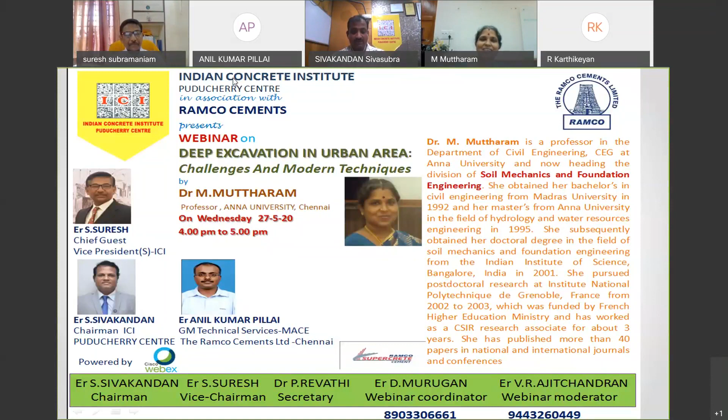Introduction of Dr. M. Muttharam. Dr. M. Muttharam is a professor at the Department of Civil Engineering, CEG, at Anna University, and now heading the Division of Soil Mechanics and Foundation Engineering. She obtained her bachelor's in civil engineering from Madras University in 1992 and her master's from Anna University in the field of hydrology and water resources in 1995. She subsequently obtained a doctoral degree in the field of soil mechanics and foundation engineering from the Indian Institute of Science, Bangalore, India in 2001.

She pursued postdoctoral research at Institut National Polytechnique de Grenoble, France from 2002 to 2003, funded by the French Higher Education Ministry, and worked as a CSIR Research Associate for about 3 years. She started her academic career as a lecturer at CEG, Anna University in 2003, was promoted to Associate Professor in 2006, and then Professor in 2014. She has published more than 40 papers in national and international journals and at conferences. She has also served as Secretary of the Chennai chapter of the Indian Geotechnical Society for 5 years and is currently an executive committee member of the same chapter.

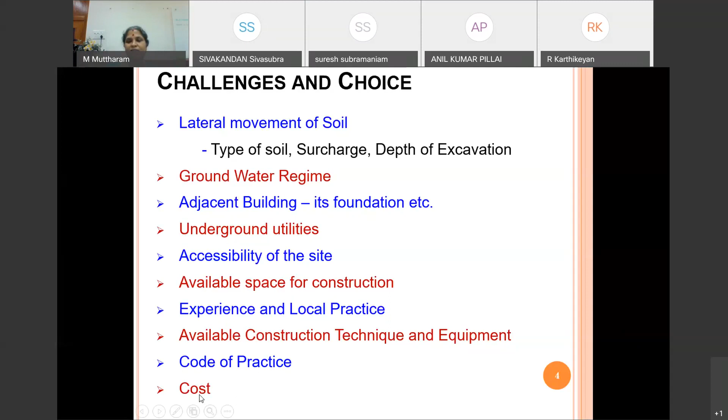And finally, needless to say, the cost of the project matters - though we want to give an economical solution, not at the cost of safety. So we have to give a safe as well as economical solution. If we want to give a safer solution for excavation, different types of support systems are available. A few of them I have listed here: starting with braced excavation, sheet pile wall, bored pile wall. We can go for soil nailing, and finally diaphragm wall.

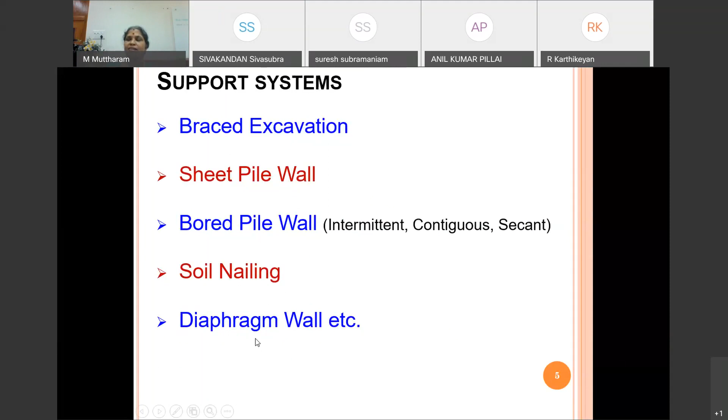If we use braced excavation, one of the problems we encounter is the working space. Here we have to excavate, and this working space would be provided with so many horizontal members, so the space is not free to work. That is one of the important constraints when we choose braced excavation. Though it is a conventional method, the problem encountered is that this free space is not available for our construction.

Then we can go for sheet pile wall. Sheet pile walls are of two types: either cantilever sheet pile or anchored sheet pile. Generally, cantilever sheet pile is preferred provided the depth of excavation is less than 6 m. If the depth of excavation exceeds 6 m, then we need to go for anchored sheet pile.

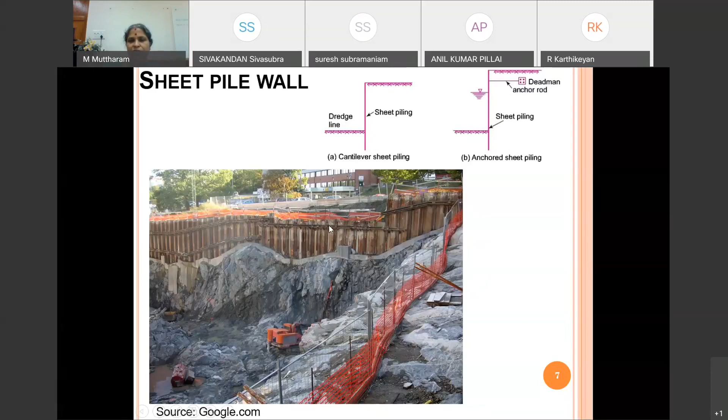The next method available, especially in urban areas, is bored pile wall. It is also a very popular technique used in urban areas for deeper excavation. In bored pile wall, we have different varieties. One is intermittent piles. This is very simple in the sense that the equipment and machineries used for constructing conventional bored pile may be adopted here also, so regarding the methodology and equipment we don't have any issues, because we can make use of existing machineries available for making the pile.

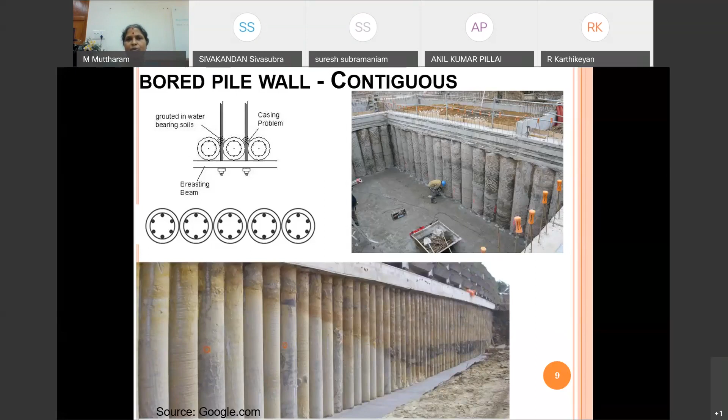The construction sequence is: first they insert the casing, if casing is required. After insertion of casing, the primary pile is constructed. Primary pile is made up of lean concrete; they may not use high grade concrete, because after making this circular pile, to construct the secondary pile we are going to drill through it, and only then is the secondary pile constructed.

That is why the quality of concrete used for this primary pile is lean concrete. The purpose of this primary pile is only to arrest the seepage of water.

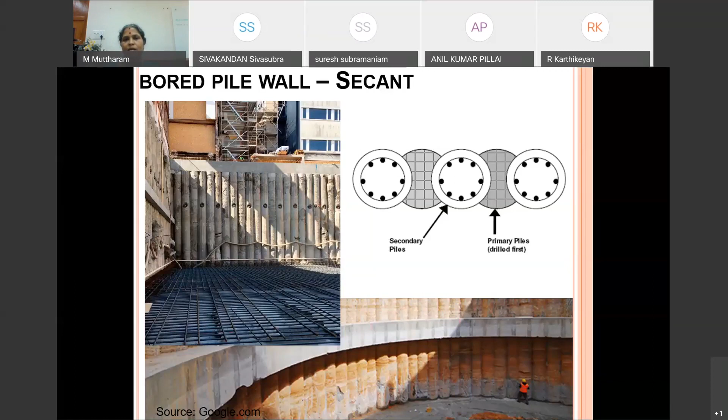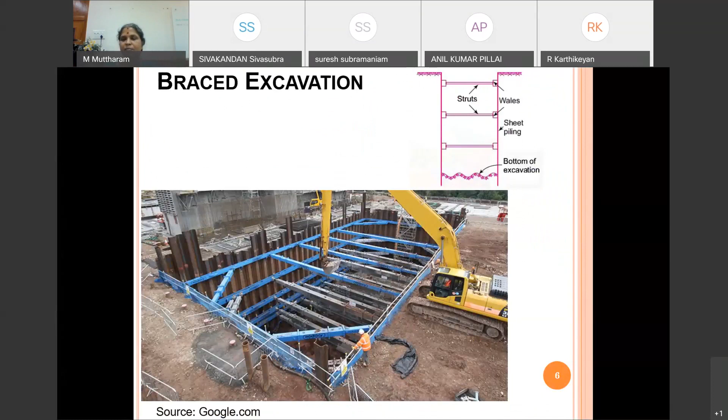Soil nailing is also a new technique. The concept in soil nailing is, so far we could see bored pile wall, and then even sheet pile wall, and braced excavation. In all these techniques, we have given support externally, meaning all these supports are passive supports. If the soil moves, then the supports are going to give the stability. Unlike in this case, in soil nailing, it is an active support.

This nail is being inserted into the soil, like how we insert reinforcement in concrete. But here this reinforcement is going to enhance the inherent property of the soil. So this type of support system comes under active support. Always this nail is going to be active, because of this insertion, this reinforcement is going to enhance the inherent strength.

Since we know that the shear strength of the soil is governed by the Mohr-Coulomb equation, we can express the shear strength of the soil using the simplest Mohr-Coulomb equation, where tau equals C plus sigma tan phi. In this equation, C is the cohesion component and tan phi is the friction component. This tan phi friction component will be enhanced if the stress normal to the failure surface is increased. So when we provide this soil nail, the normal stress normal to the failure surface is increased, because additionally the normal component of reinforcement force would come, and then the tangential component of this reinforcement force is going to directly counteract the shear forces.

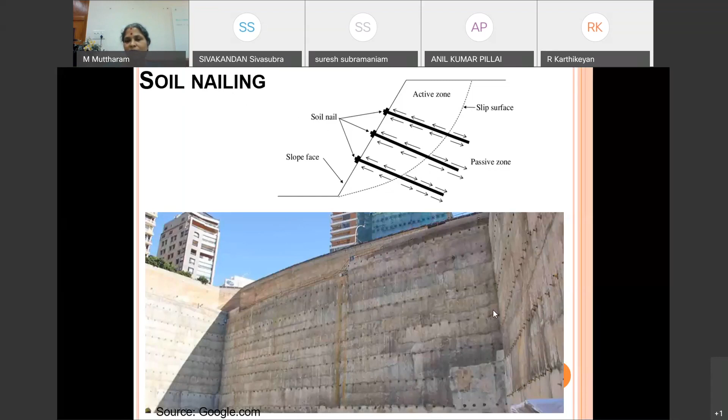Coming to diaphragm wall, I can say diaphragm wall is one of the modern technologies adopted for deep excavation. The way it has gained popularity is that this diaphragm wall is a rigid wall, and the lateral movement is going to be restricted to a considerable limit. Whatever may be the required limit for lateral movement, it is possible for us to achieve using this diaphragm wall. So that's why I call this modern technology.

And nowadays we have construction equipment. Several construction equipments are there. And the main principle behind the construction of diaphragm wall is using slurry supported trenches. We make a trench, and the trench is going to be supported initially by slurry. The slurry is made using bentonite. The availability of bentonite really made our job very easy to go for diaphragm wall.

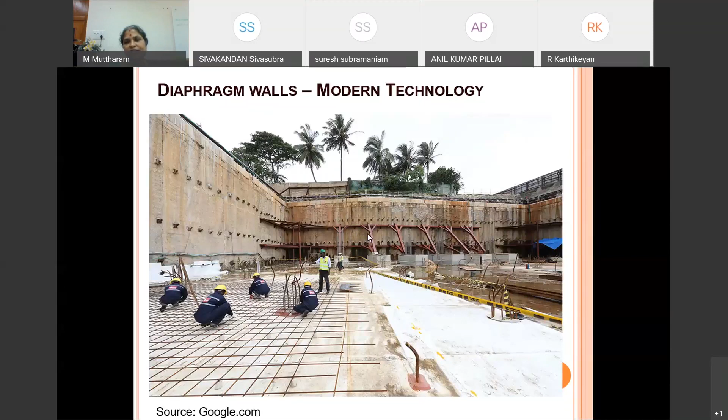This photograph shows the diaphragm wall constructed in one of the excavation sites. Another important aspect in diaphragm wall is that it can be either a temporary support or a permanent support, but mostly we would be designing diaphragm wall as a permanent support, in the sense it can share some part of the load from the superstructure as well. So mostly diaphragm wall is designed as a permanent structure.

And one more thing, this diaphragm wall is constructed as panels, so the number of joints present in the diaphragm wall is reduced compared to say bore pile wall. In bore pile wall, though we go for secant pile or contiguous pile, there is a joint between one pile and the other pile, so the number of joints are more. But in case of diaphragm wall, the number of joints are less. Why we should bother about the joint is, if we encounter the water table at a shallow level, water can seep in through the joints.

This will cause a problem, that is why we have to reduce the number of joints. In case of diaphragm wall, the number of joints are less, so it ultimately improves the water tightness, and it improves the stability of the wall. And since it is a rigid wall, the deflection of the wall itself is lesser, and we can easily make use of this even in congested areas.

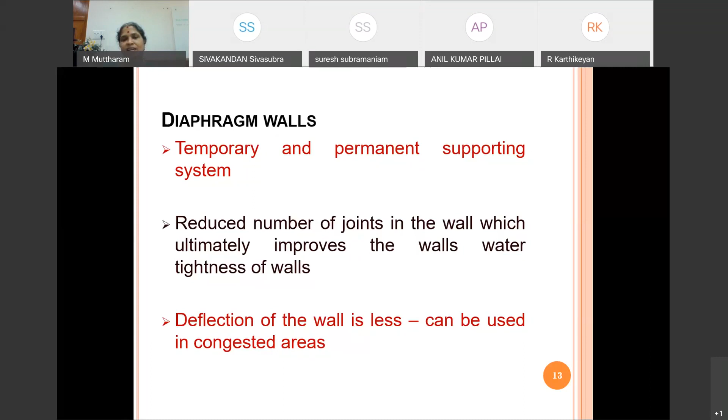A few applications of diaphragm wall are: it is used as a retaining structure for deep basements of buildings and traffic underpasses, underground mass transit stations, parking garages, underground industrial facilities, and so on. Even in our Chennai Metro Rail, for those stations, they have used a diaphragm wall underground. This underground mass transit station is being constructed using diaphragm wall.

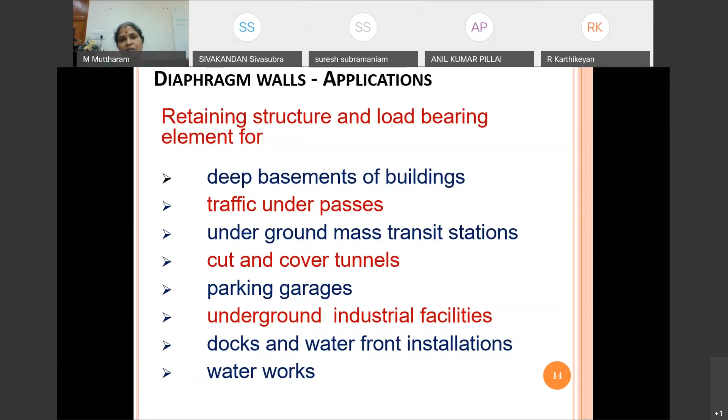Other advantages, from the perspective of construction engineering, are that we can make use of this diaphragm wall in any type of soil, irrespective of the type of soil and irrespective of the depth, regardless, and as well as regardless of the presence of groundwater table, we can choose diaphragm wall construction.

This construction of diaphragm wall simultaneously fulfills the task of sheeting, waterproofing, and load bearing. All three tasks are met in one thing by constructing this diaphragm wall. And each and every phase of operation is mechanized - we have machines to execute this construction work.

And the noise, whatever we get during its construction, is very less. So we can easily adopt this method. Even in a confined space, we can make use of this technique.

It has got excellent properties as a load-bearing material, especially when we go for basement floors. I can say that diaphragm wall is going to be one of the best methods of support system, because we can design the diaphragm wall such that it shares part of the load from the superstructure also.

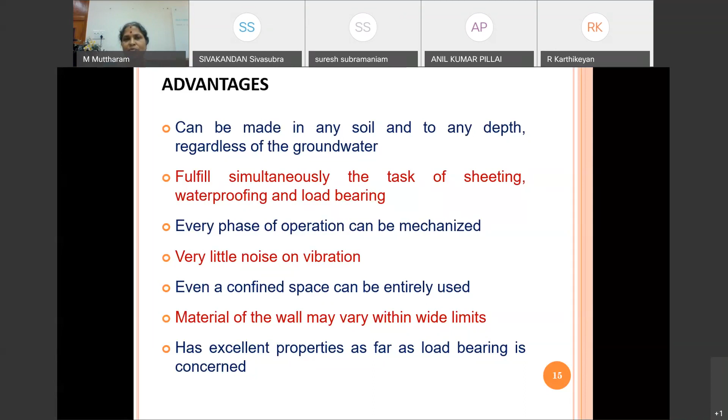Its stiffness is increased by giving buttresses. When we construct diaphragm wall, we can give buttress, and even we can give anchorages also, at different levels depending upon the depth of excavation. We have to anchorage properly this diaphragm wall so that we get the required stability.

Since this diaphragm wall is constructed in sections, we can easily carry out this diaphragm wall construction. And there is no major surface grading required before making trenching - we don't need to worry much about that particular size.

As I mentioned during our discussion on braced excavation, it doesn't give clear site. Braced excavation doesn't give clear site. But in this case, diaphragm wall would give simple and clear site compared to the other traditional foundation pit.

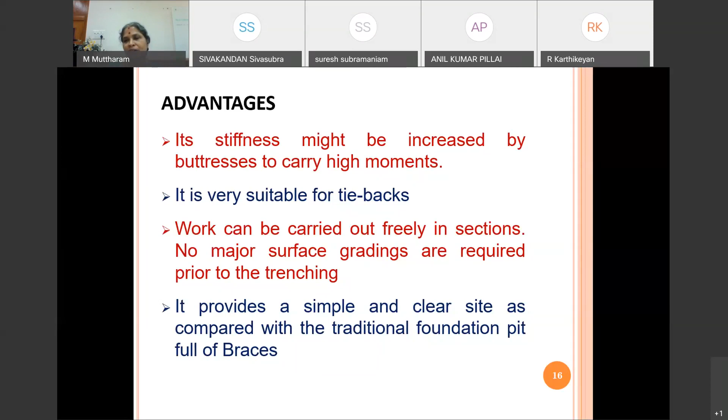So far I could discuss several advantages of diaphragm wall. Engineers, we should be aware of the disadvantages first, because we should not make any mistake during construction. When we make any mistake, then we have to pay a lot for it.

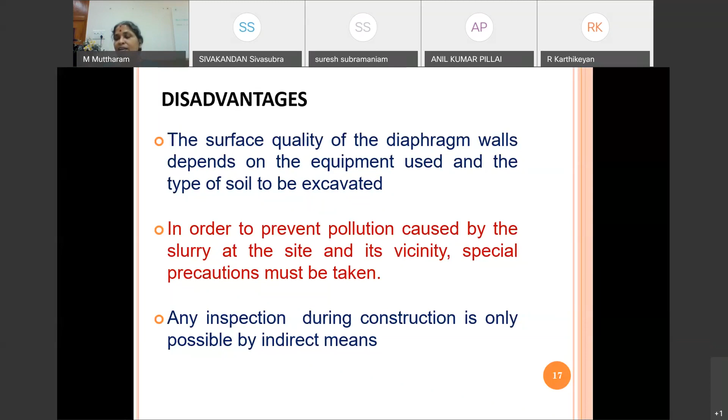The disadvantages are: the quality of diaphragm wall after construction mainly depends upon the equipment we have used and the type of soil on which we have excavated. Since we use bentonite slurry for constructing this diaphragm wall, the quality of concrete, whatever we get after construction, needs to be verified. And the quality could be verified only after construction, and that too through indirect means - directly, we cannot check the quality of wall, whatever we could get.

Other disadvantages: suppose if the site requires us to construct this diaphragm wall in open water, or in a layer where we have artesian water, or if we have a poorly compacted fill, or if we have existing buildings adjacent to this one, or unknown sewers, caverns, public utilities, etc. In that case, we have to prepare the ground first, then only we can go for this technique.

In case of coarse grained soil, there is going to be heavy loss of bentonite slurry. So if more loss of bentonite slurry is anticipated, we have to be very careful in using this technique. I don't say that it is impossible - it is possible. We should be careful about executing diaphragm wall when we encounter these conditions.

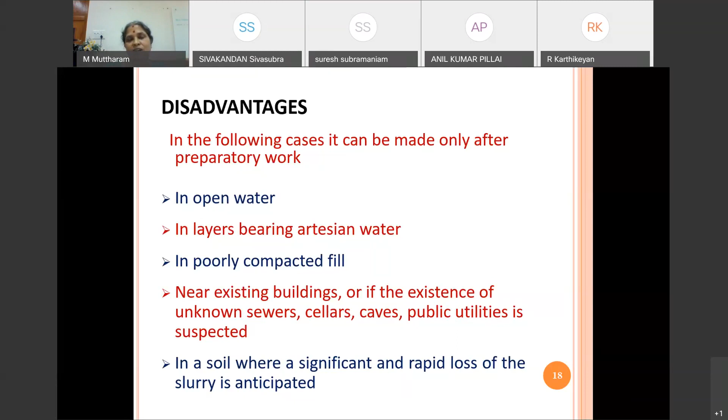Now let us briefly go through the construction sequence of diaphragm wall. Let us say this is the length of the wall to be constructed. This length will not be constructed in one single stretch. This entire length is going to be divided into different panels.

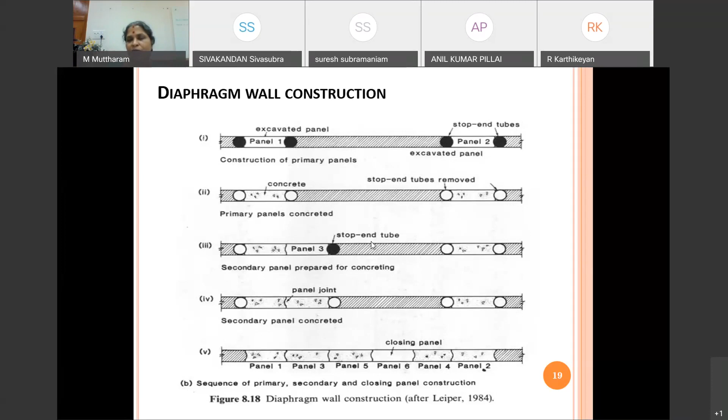Let us say here we have panel 1, and once this first panel is constructed, we move on to the second panel, starting from the other end of our excavation. This will not be constructed continuously. We start from one end, go to the other end, construct the second panel, then come back to this second end. In that way, we proceed with construction of the diaphragm wall.

Now here you see, this is our proposed first panel. Prior to construction of this first panel, we need to construct a guide wall. Guide wall design is very important, because the guide wall is going to guide the construction of the diaphragm wall. In this diagram, the top horizontal line is the top level of the guide wall.

After constructing the guide wall, this grab is used to remove the soil. Simultaneously, while removing this soil, bentonite slurry is continuously allowed to enter into this opening, so at any point of excavation there is no open space. The excavation is always being filled with slurry. That is why this technique is known as slurry supported trench. After removing this entire cutting, this area is being filled with bentonite slurry.

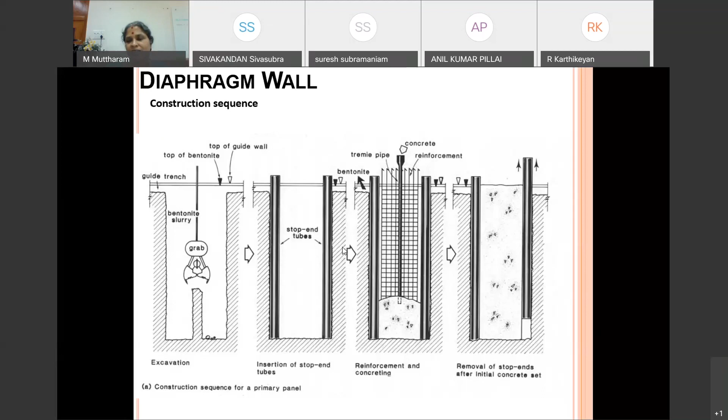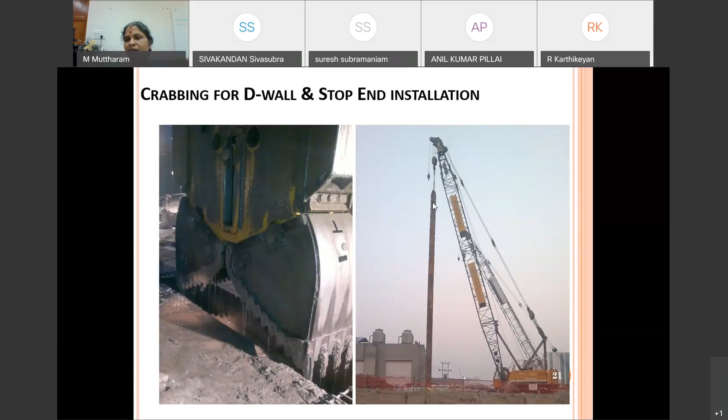From the procedure, you should have understood that this trench is always being filled with slurry, so it is never left as it is. That is why the stability is ensured. Here are a few photographs: this is the grabbing equipment used for construction of the diaphragm wall, and this is a stop end tube being lifted for erection. This is the close-up view of the clamshell excavating a slurry trench.

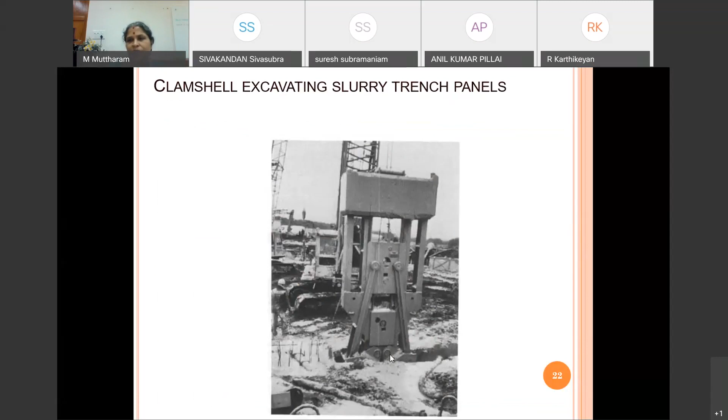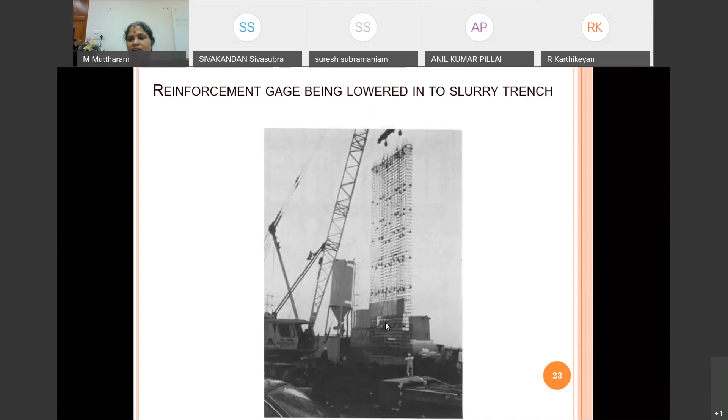In this slide, you can see the reinforcement cage. This is based on the bending moment expected in the diaphragm wall, so we should already have designed the reinforcement detailing. This is the form. This reinforcement cage is inserted into the trench, and then the trench is filled with concrete.

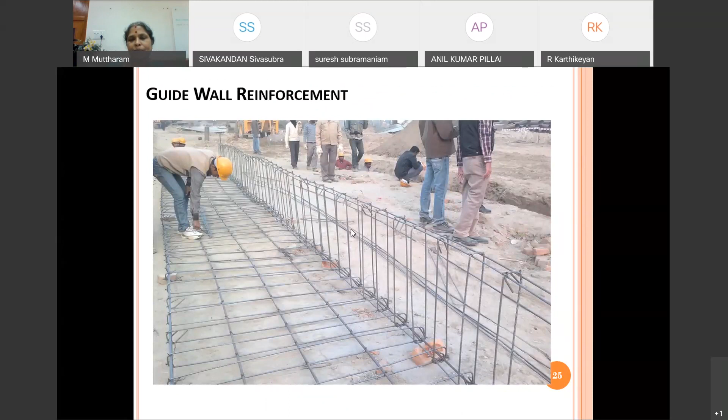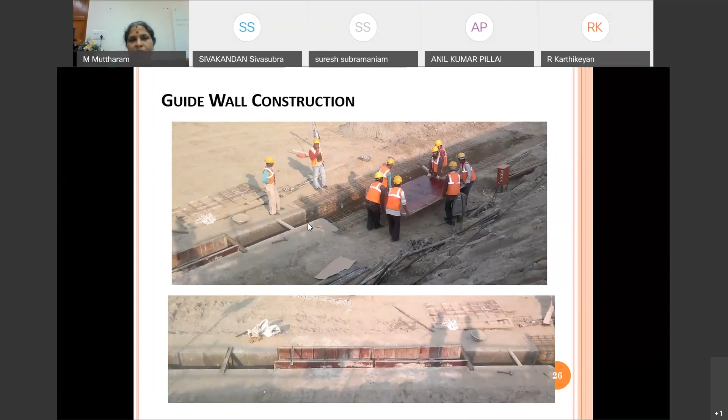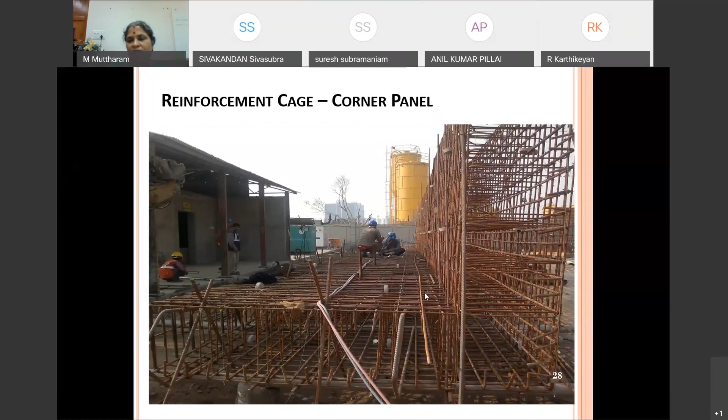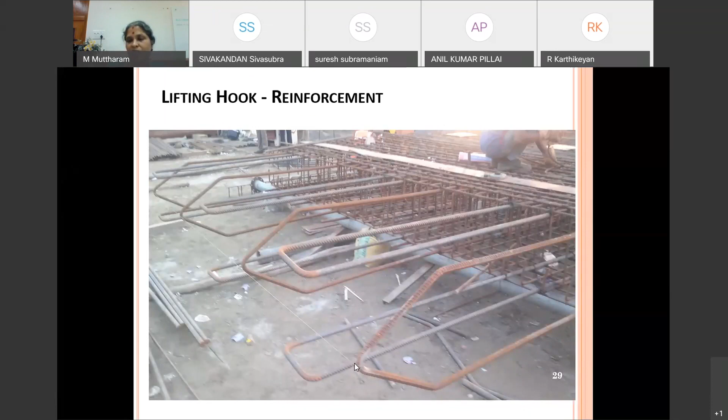In the reinforcement cage, this is the provision given to lift this reinforcement cage prior to inserting it into the trench.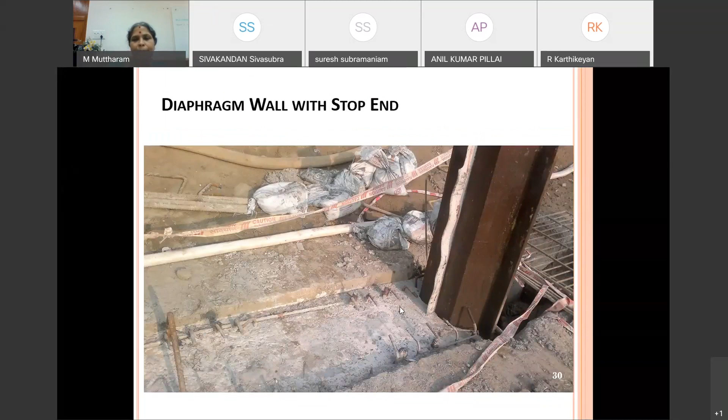Now, if you want to design the diaphragm wall, first we should be aware of different factors which would influence the stability of the slot. The forces which stabilize the trench are the support of the guide wall and the internal strength of the soil.

The guide wall is constructed, and this trench is filled with slurry. So we need to know the internal strength of the soil. The disturbing forces acting in opposition, causing failure, are the hydrostatic pressure, self-weight of the adjacent soil, and surcharges and other forces acting adjacent to the excavation.

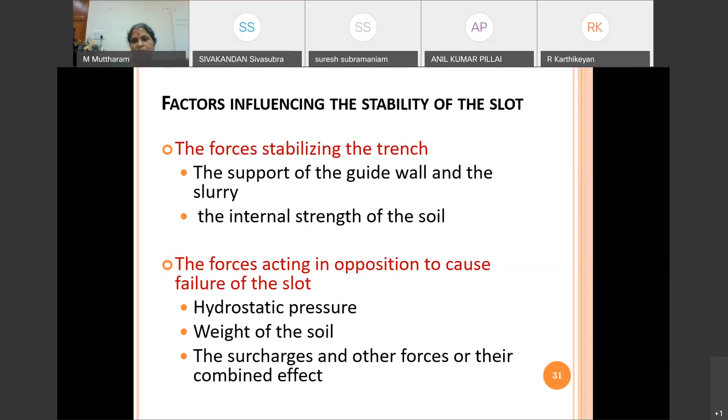Depending on whether the soil is in at-rest condition, active condition, or otherwise, we calculate the lateral earth pressure. Generally during construction of the diaphragm wall, initially the soil is in at-rest condition. But once excavation starts, the soil moves from at-rest toward active state. There may not be complete mobilization of the active state; the soil condition would be between at-rest and active state.

What I suggest is we can assume the soil achieves active condition and design accordingly, because if we consider at-rest condition, the design is not going to be economical. That's why I suggest active state. But if you are not sure about the mobilization of this shearing resistance, you can consider at-rest condition. So at any level, we have to get the lateral earth pressure.

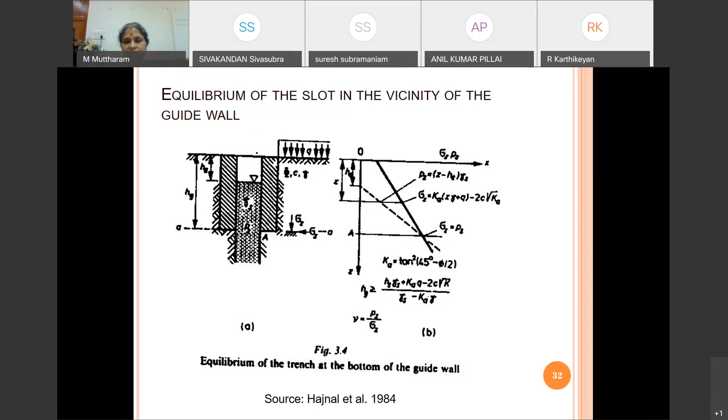So far, I could give an idea regarding different types of support systems and what is a diaphragm wall, and so on. Now, I would like to share my experience in two case studies. The first study area is in Noida, where they have constructed a diaphragm wall, and the other study area is in Bangalore. I just want to share information I could get from these study areas. Hope it will be useful.

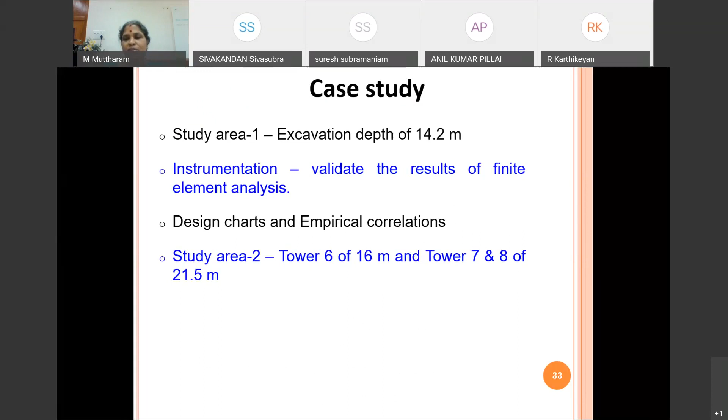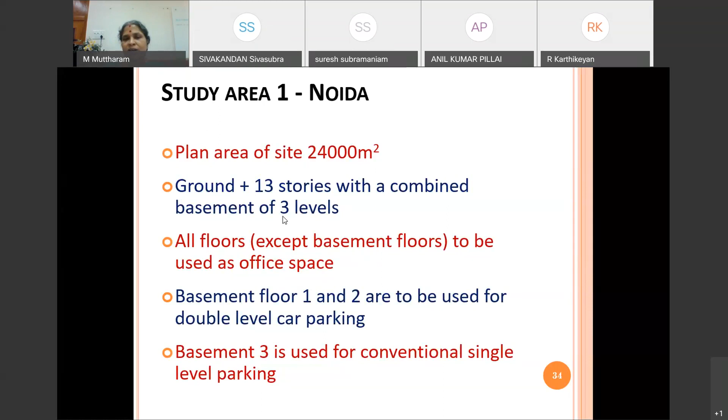The first study area is located in Noida. Here our job is to construct a G plus 13 story building with a combined basement of 3 basement floors. To carry out the work in this study area, rigorous subsoil investigation is being carried out. For any work related to geotechnical engineering, without a subsoil investigation we cannot execute, because the type of support system is a function of the type of soil present at the site.

So definitely we have to go for rigorous subsoil investigation. In this site, the subsoil investigation is carried out by drilling boreholes and conducting SPT tests. After rigorous subsoil investigation, the soil profile is prepared based on the type of soil present. It has been decided to go for a diaphragm wall.

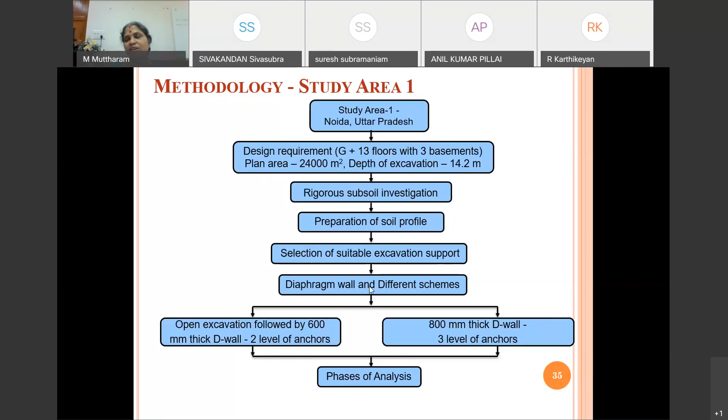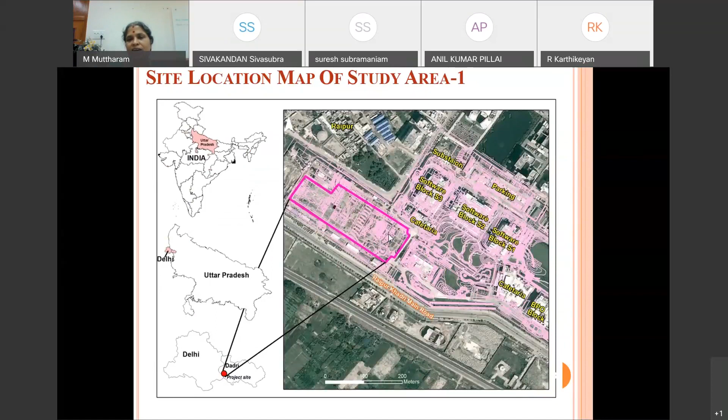I will show this site map. This is the site map of study area 1, and in this study area, 23 boreholes were drilled. Based on these boreholes, we were able to get the depth, the SPT N value, and the type of soil encountered. In this particular site, almost up to the excavation depth, the type of soil encountered is sandy soil.

All of you know that excavation in sandy soil is a real challenging task. At least if the soil has cohesion, then up to a depth of 4C by gamma, no support is required. If the soil is sandy, definitely we have to provide support. So in this first study area, the type of soil present is sandy soil, which is why it has been proposed to go for a diaphragm wall.

Here in this diaphragm wall, this is the shape of the excavation. Depending upon the presence of adjacent buildings, two thicknesses of diaphragm wall have been chosen, because on one side the adjacent building is not present. That is why on that side, a 600 mm thick diaphragm wall is designed. For the other 3 sides, an 800 mm thick diaphragm wall is designed.

Moreover, for the 600 mm diaphragm wall side, there was some space available, which is why 2-level anchoring is given there. For the 800 mm thick diaphragm wall, 3-level anchorage has been given.

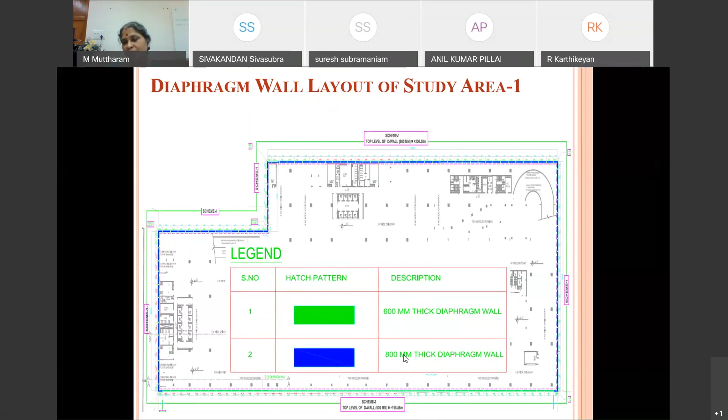This is the D wall with anchors in study area 1. This is one of the corners. On the right hand side you could see the diaphragm wall; this diaphragm wall thickness is 800 mm. You can visualize the 3-level anchoring given here. On the other side, the 600 mm thick diaphragm wall has 2-level anchors given.

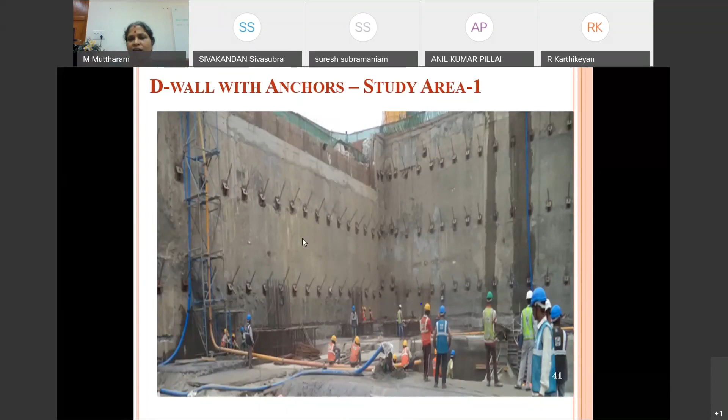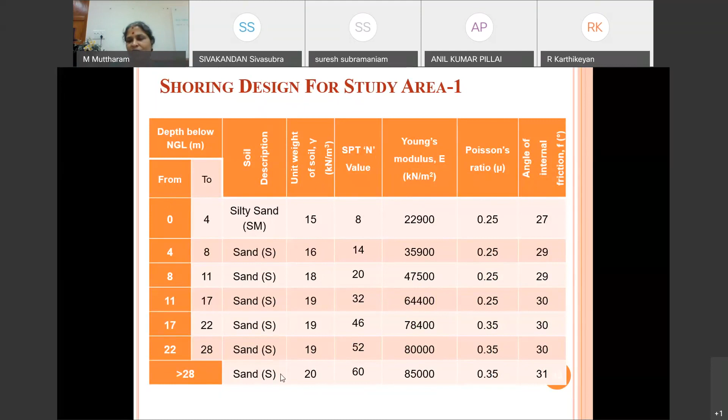In this site, instrumentation is being carried out. The wall deflection and lateral movement of the soil is observed. Using that lateral movement of the soil, some design charts have been developed. This slide shows the type of soil encountered in the first study area and its corresponding SPT N value. Since the soil is sand, we are forced to go for a diaphragm wall.

I want to show only one excavation scheme. This is the excavation scheme for the 800 mm D wall, for which 3-level anchoring is given. When we provide this anchor, we should ensure that the anchorage does not penetrate any adjacent foundation present. So the position of the anchoring is very, very important.

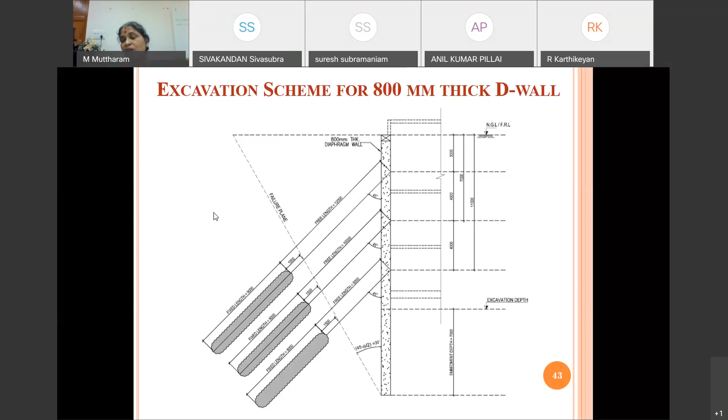Added to that, the anchorage grouting should be done in the area beyond the active zone. From the bottom of the D wall, if you draw a failure surface, in this portion the soil would be between at-rest and active state, so we need to place our grouting beyond this zone. The type of foundation of the adjacent structure plays a major role in positioning these anchors and even deciding the length of the anchors.

This entire thing is analyzed using Plaxis software, a geotechnical software used for the design of foundations and so on. For this analysis we used Plaxis 2D, and using it we could obtain the displacement for this 800 mm thick wall. This displacement we obtained is within the permissible limit, which is why we have proceeded.

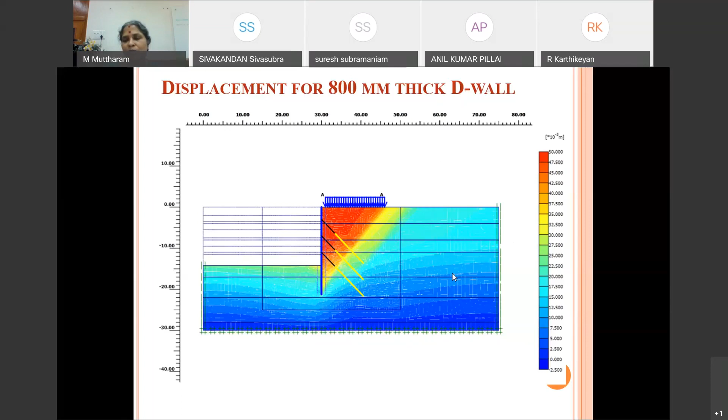And from this analysis, we could get the shear force and bending moment diagram for the D wall. Based on this maximum shear force and bending moment diagram, structural design was carried out. I will not touch upon structural design because I am a geotechnical faculty. I concentrate only on the geotechnical aspect of this excavation and construction of the diaphragm wall.

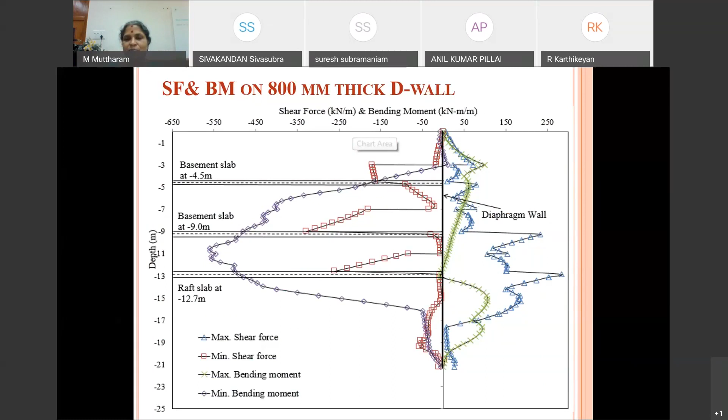In this particular site, instrumentation is being planned, and using inclinometers, lateral movement, that is horizontal displacement of the D wall, is being measured. Using this inclinometer reading, the data is being fed into the Plaxis software. Whatever analysis we made using Plaxis software is being compared with the actual field data, and we could find that it is acceptable. Since this is acceptable, we made a rigorous analysis.

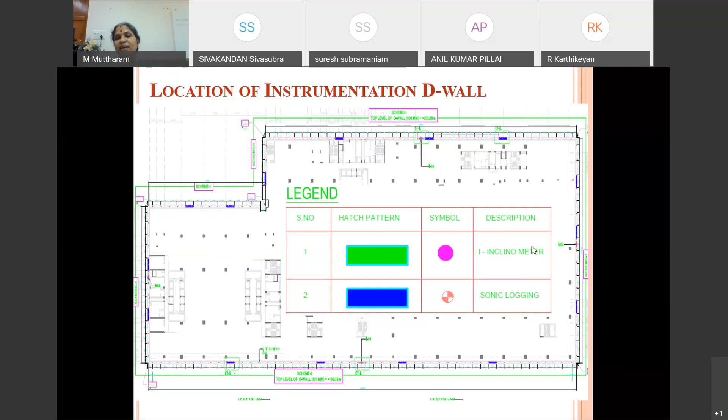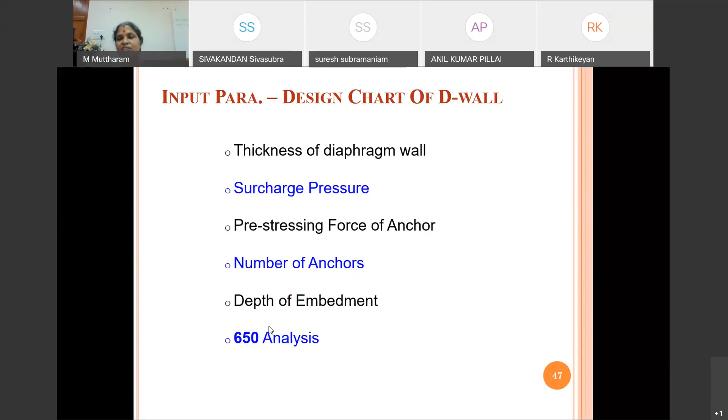Using the data, we have developed the correlation for this factor of safety - what factor of safety is available with respect to the diaphragm wall thickness of 700 to 1000 mm. So if we choose to opt for a diaphragm wall whose thickness will vary from 700 mm to 1000 mm, we can check what could be the factor of safety we could encounter, provided we have Q as the surcharge adjacent to our excavation.

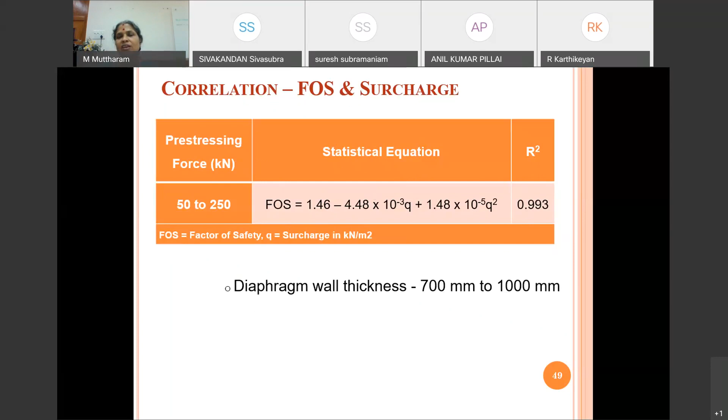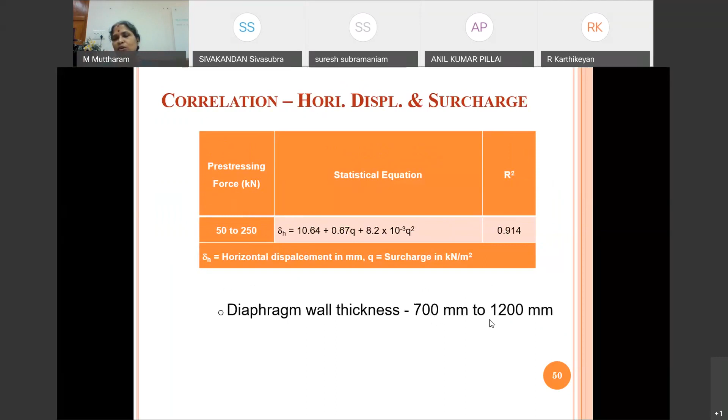In a similar way, we have developed an equation to calculate the horizontal displacement, again for a D wall thickness varying from 700 mm to 1200 mm. Similarly, we could develop the correlation even for shear force and surcharge. We can easily calculate or estimate how much could be the expected shear force for a given surcharge.

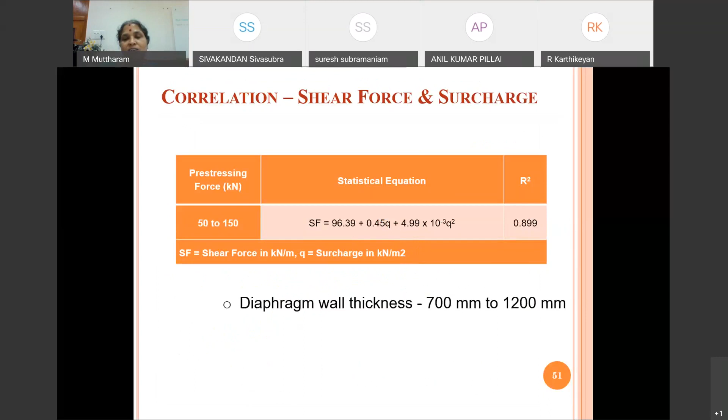In this equation, individually, each factor is being taken into consideration. But when it is a question of designing the support system, we have to collectively take into account all the factors. So we made an attempt to develop an equation using another software. This used JMP software, and then using the statistical SPSS tool, we could develop this rigorous equation.

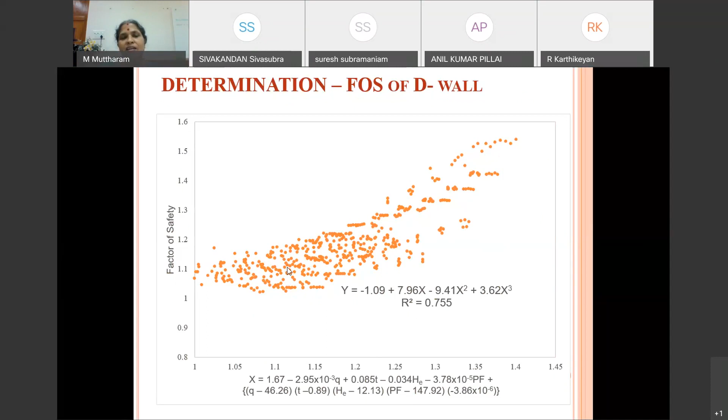You see the dots - 650 data points have been used to develop this equation. So we have developed the equation to calculate the factor of safety, and then to calculate the horizontal displacement, and then shear force, finally bending moment, provided we know how much is the surcharge adjacent to the excavation, what is the thickness of the diaphragm wall, what is the depth of excavation, and what is going to be the pre-tensioning force we would give in the anchors.

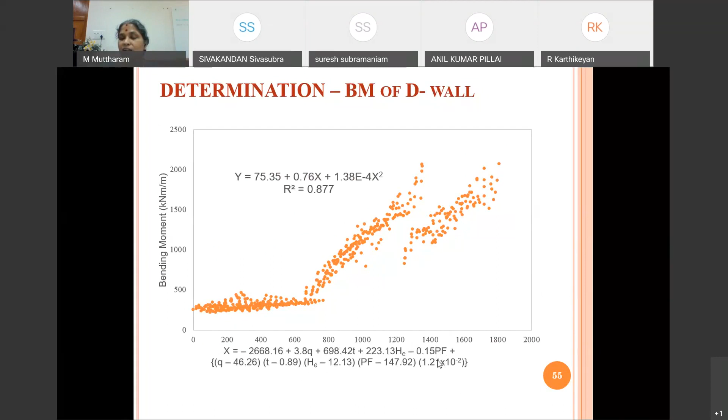Why we made an attempt to develop this equation is, generally when we execute any work, the initial stage is preparing the estimate. So for the primary design, we want to estimate the expected deflection, shear force and bending moment. So while floating the tenders, during that stage, we can make use of this equation and easily estimate these values. Because when we want to run the program, it takes several days, and moreover, we should have the facility of this Plaxis software also.

Only then can we run the analysis. As a ready reckoner, we can make use of this equation and estimate the expected shear force and so on. I hope this will be to some extent useful during the preliminary stage of design of the diaphragm wall.

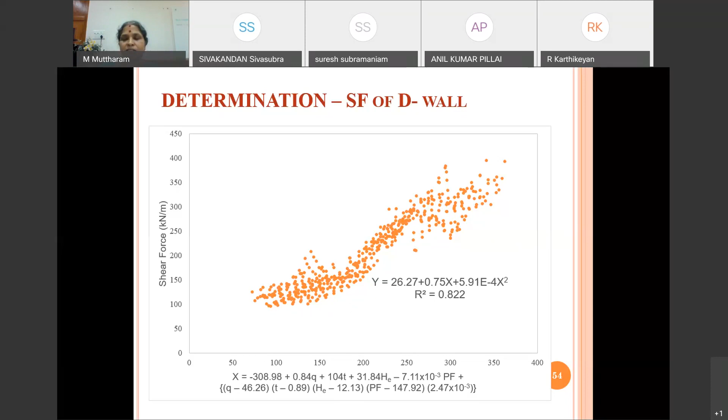Coming to the second case study, why I have chosen this is: after doing rigorous detailed subsoil investigation and designing several support schemes, in one of the phases, the support system has failed. I should not just project only the positive aspect - I should also discuss failures, because generally people will never share their failure. What I feel is only if we share our failure, at least others may not make the same mistake. That is why I thought of discussing this second study area, which is located in Bengaluru.

Here the requirement is to construct a G+10 floors with 3 to 4 basements, because in 3 towers, a few towers have 3 basement floors, and 1 tower has 4 basement floors. I may not discuss all those things. Wherever one of the support systems failed, only that particular aspect I want to discuss in our presentation.

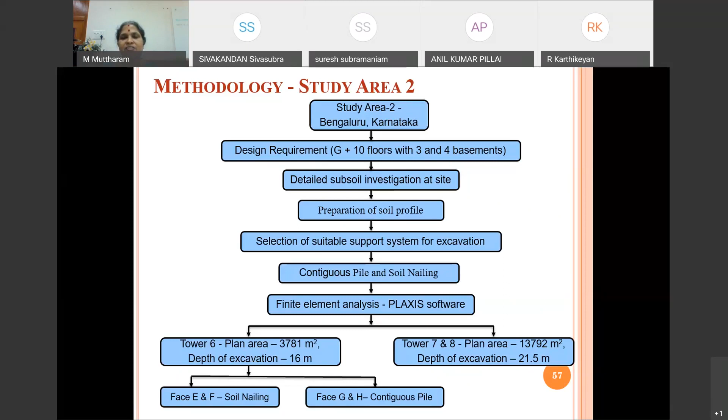This tower 5 is already existing. When we designed the excavation scheme for tower 6, we did not encounter any problem. Only in the tower 7 area, in the phase I call phase D, has there been a collapse. This failed during construction. Actually, here we did not use

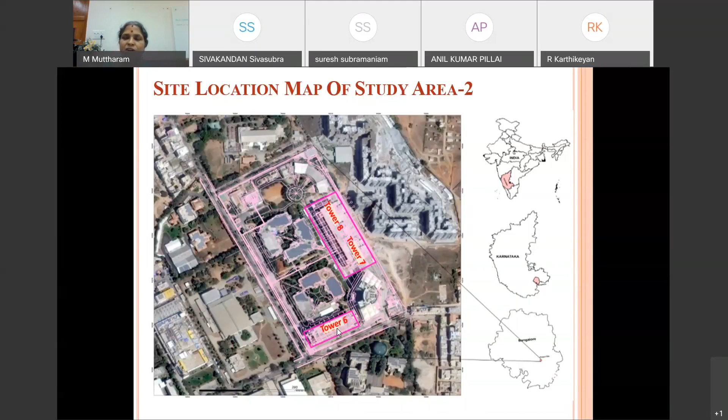a diaphragm wall. On this side, contiguous pile is used. Contiguous pile and soil nailing, for both tower 7 and tower 6 locations, soil nailing and contiguous piles are adopted. So now let us see how it failed, why it failed, and so on.

Initially, 10 boreholes were drilled in that area based on the soil profile. We planned to go for either soil nailing or contiguous pile. During the construction stage, since the soil profile was erratic, 5 more additional boreholes were drilled, and we reconfirmed the type of soil present at the site.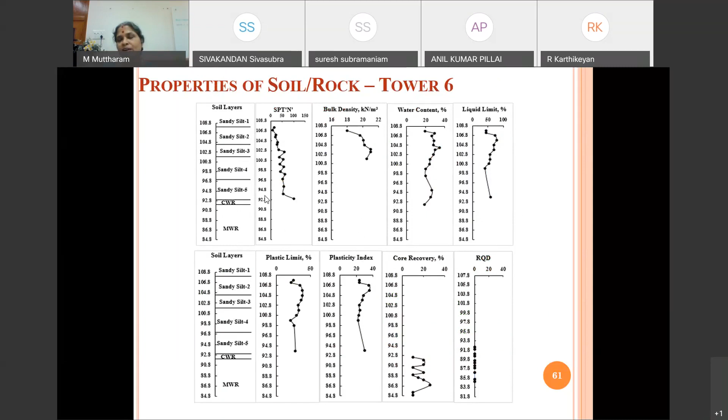But in the soil nailing portion there was no problem, because on this side also there is no load. Even here, adjacent to this portion, no heavily loaded structure was present. So we encountered trouble only in face D.

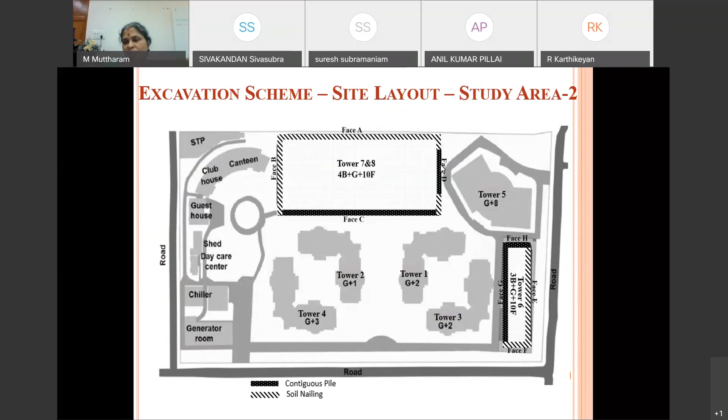Why I want to stress this is that soil nailing uses the concept of increasing the inherent strength of the soil, but contiguous pile gives external support. Since the nailed wall enhanced the inherent strength of the soil, not much distress was encountered in this portion. Now we can see the reason why it failed.

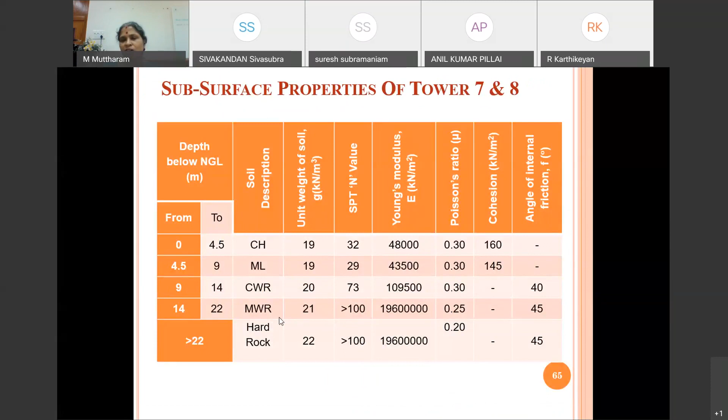So each pile is being terminated at a different level. The reason is, during construction of this pile, they encountered difficulty in drilling because they used the boring technique. Since they assumed they had encountered the hard stratum, they could stop the pile at a different level. So the bottom of the pile is not at the same level.

Another reason why it has failed is the heterogeneous nature of the subsoil strata, especially at the bottom of excavation, and the depth variation of weathered rock. The thickness of the weathered rock is not uniform. At each pile location, the depth varied. In a short length itself, we could witness huge variation.

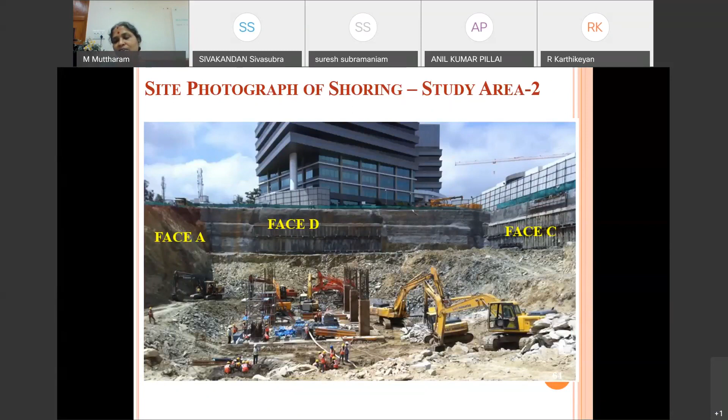After constructing the diaphragm wall, in this photograph you could witness that the contiguous pile wall is standing properly. The mistake was that closer to one of the piles with shorter length, they started excavating the berm. So that particular pile lost its anchorage and started failing, which led to the failure of the other pile. That is one of the reasons.

The second reason is the excess cutting of rock mass, then the dynamic impact of construction equipment. Closer to the contiguous pile, they used this construction equipment for excavating, so the dynamic impact also played a major role in the failure of this particular face.

So this face D has failed. We did not stop at that level. Since it had failed, immediately at the site we had to take some precautionary measures, because adjacent to this site we have this tower 5 which is resting on a raft.

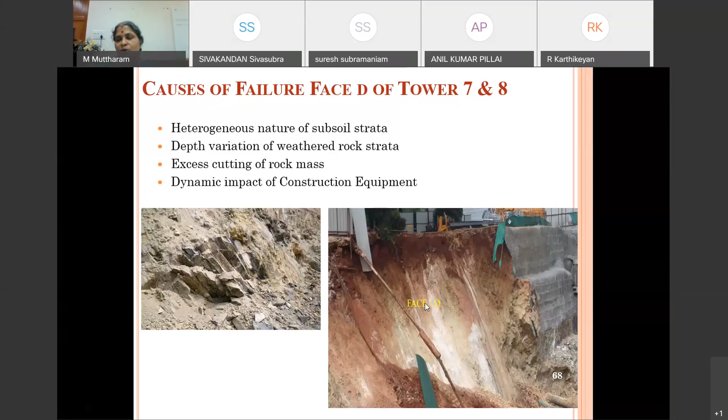So immediately how this site was protected is, people used the loose soil available at the site and backfilled it. By doing so, we transfer this vertical cut into an inclined slope. Earlier the cut was vertical.

Because here the contiguous pile was present, now after failure, we don't want the adjacent structure also to fail. So immediately this side slope is flattened by backfilling the available loose soil, and the top of this loose soil is covered with a silpaulin sheet, and sandbags have been kept because this is a temporary support. Immediately at that site, after collapse of the contiguous pile, this was the provision made.

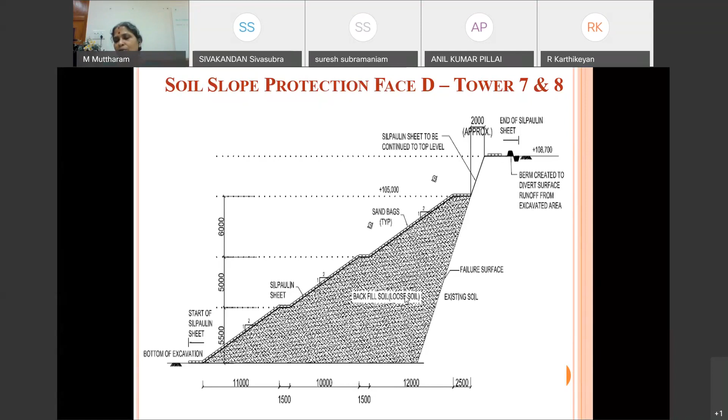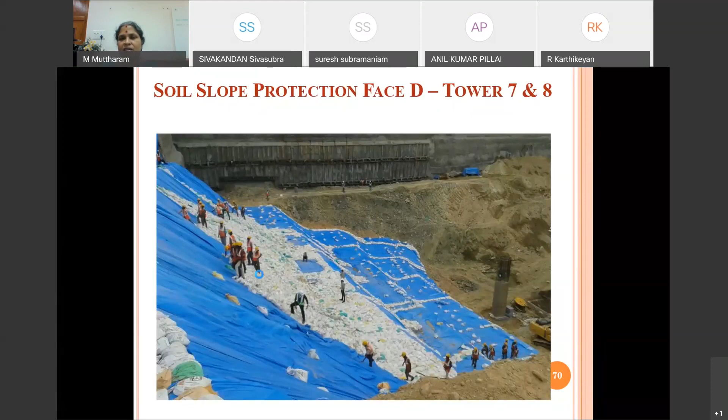This is the remedial measure taken, because after we understood that this contiguous pile had failed, immediately the design was revised, and this time it was proposed to go for soil nailing. So soil nailing is proposed, just below the footing area of this tower 5, because we should take care of the adjacent structure also.

So below the footing area of this adjacent structure, a grouted nail with micro pile is suggested, and away from the footing area of the tower 5, only the grouted nail is suggested. Now this construction is over, and even the tower is completed. No problem in excavation, no problem in design, constructing the basement.

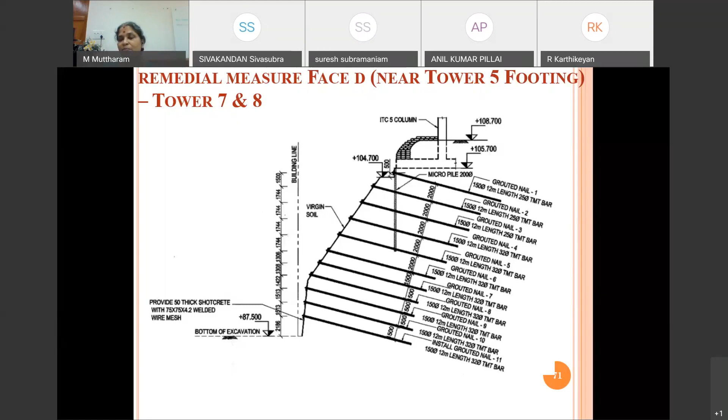So with this, I would like to sum up today's presentation. We discussed the diaphragm wall, its importance, and based on rigorous analysis using Plaxis software, we developed some empirical equations that may be useful for design engineers, especially during the preliminary stage of design. We cannot take any support system for granted.

The choice of a suitable support system really plays a major role in the stability of excavation. So after designing, during excavation also, we have to be alert in safeguarding the adjacent structure as well as our excavation. That is why in today's presentation I discussed two case studies: one on the diaphragm wall, the other on the contiguous pile wall. Unfortunately it has failed, but still I wanted to share this information so that in future these kinds of failures would not occur.

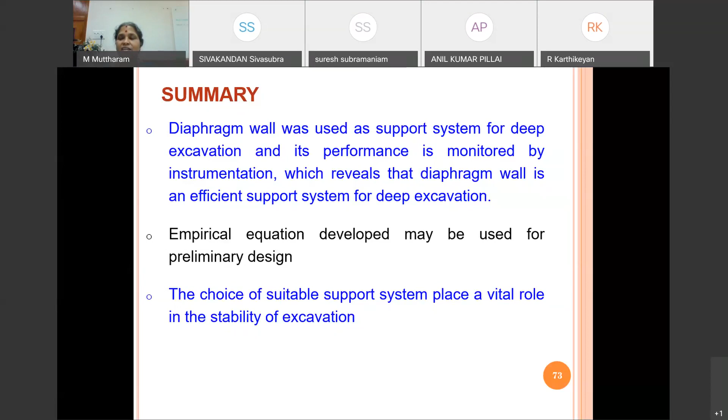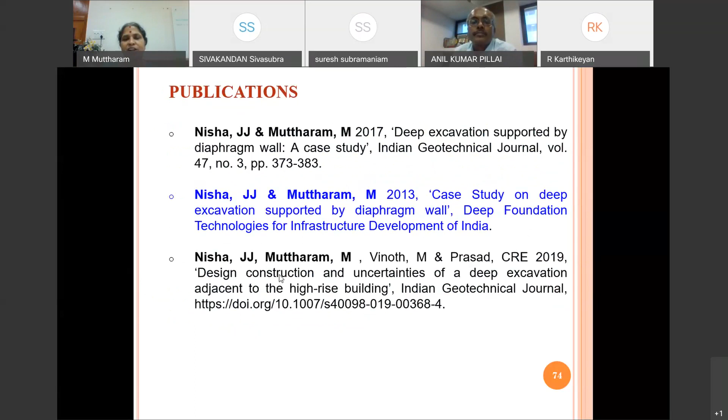These are a few publications made based on our work on deep excavation. If you are interested, you can refer to these publications.

A few references I referred, and I'd like to express my sincere thanks to Dr. Jasmine Nisha, my PhD scholar. It is her work, I just guided, and whatever information I shared is the doctoral work of Jasmine Nisha. A few photographs I googled and could post here.

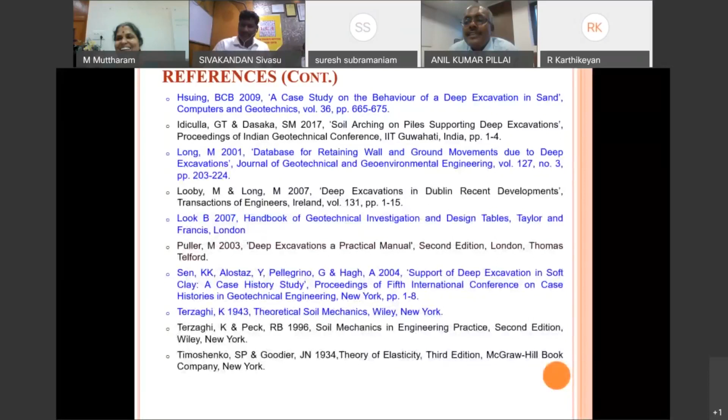For that interesting presentation, I just went back to those days when I was associated with a site in New Delhi where the Parliament Library project had diaphragm walling to be made. There were so many challenges which you presented, like the bentonite slurry going into the earth, stabilizing them, lowering the reinforcement cage, and concreting. It was a very challenging experience, in the year 2000. There was not much practical study on diaphragm walling, but we could make it. So viewing that, it was very interesting.

There is a question from the participants: why is bentonite slurry being used? Because bentonite, even in less weight, if added to water, gives a viscous fluid which has a thixotropic property. So because of its viscosity, it gives more stabilizing effect during excavation.

Nowadays people are adding some nanomaterial also. Bentonite is being replaced by nanomaterial. Even in L&T, people are going for nanomaterial, not completely replacing bentonite, but adding a little so that we get good working space.

Another thing is bentonite is a conventional material. Even for casting our bored pile wall, we make use of bentonite. We are comfortable using it, and it is low cost. It is a thixotropic material and can easily form a thick filter cake, which will not allow adjacent water, if present, to seep into our excavation area during excavation.